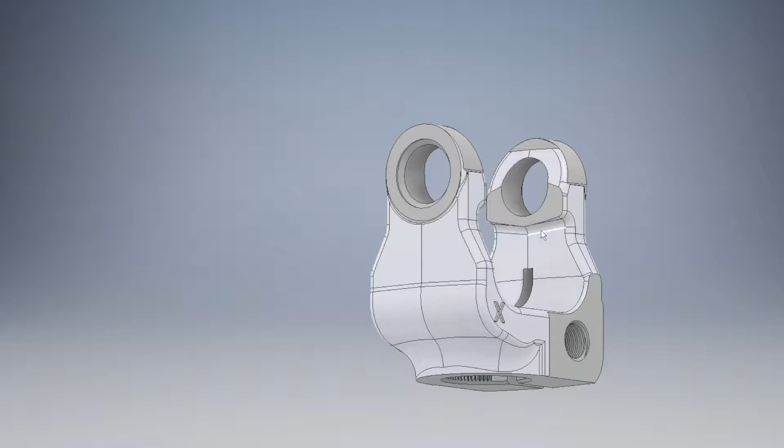Roop Automotives is engaged in manufacturing yokes, universal joints, intermediate shafts, steering sub-assemblies and column assemblies for Tier 1 suppliers across the globe.

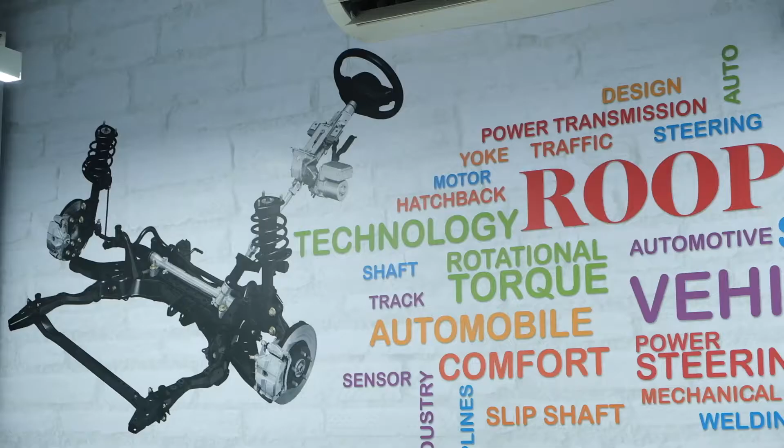We are the largest manufacturer of yokes in the world and we produce around 35 million yokes per annum. All the global manufacturers of passenger cars use our products.

Roop Automotive established their R&D in 2012 with the vision of doing basic innovative research in the field of processes, product design and manufacturing, so that we can compete with global competitors in the field of productivity, cost and quality.

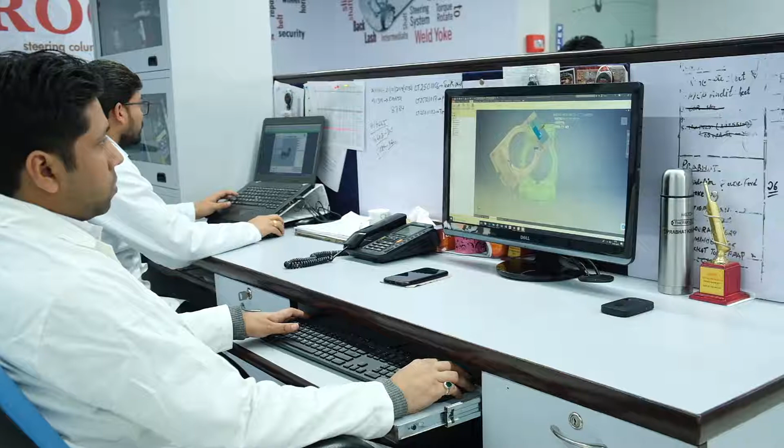We are doing our R&D in the field of product design, process design, and we are also improving our existing processes for mass manufacturing.

The main objective of our R&D was to improve the processes, to innovate the processes, to improve the quality of the product, and to cater to the demand of technical complexity and tight tolerances of our customers.

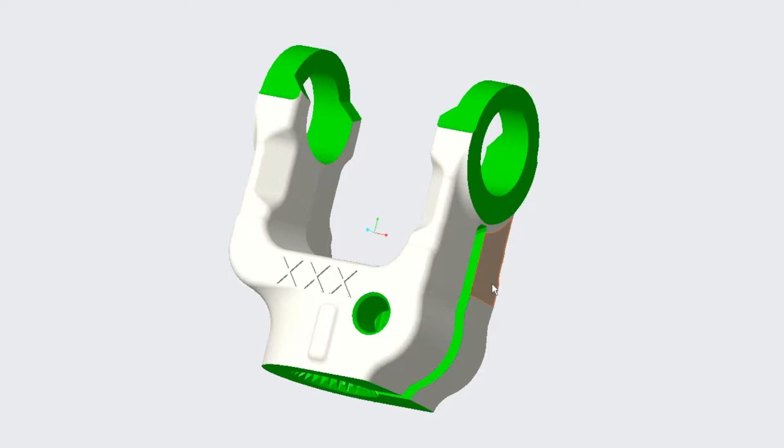So we are continuously engaged in innovating and finding new processes and new design methods, and we are applying our capability of simulation with the help of CAE software so that we can come up with the global standard.

of technological advancement for our customers. Currently we are doing two major projects. One is...

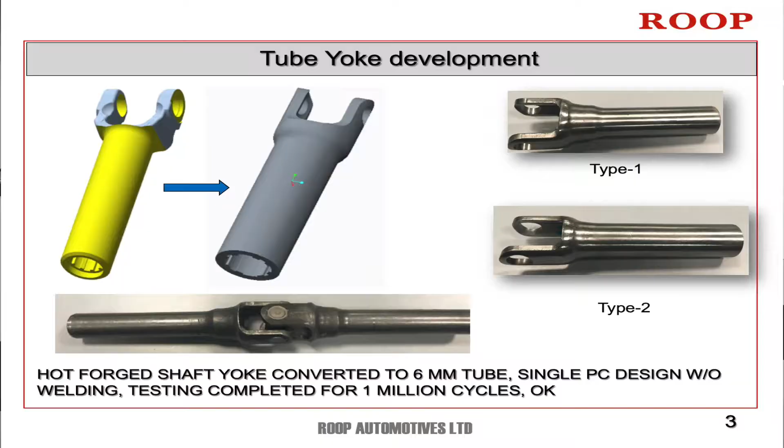single piece tube yoke, which is a replacement for one assembly comprising a yoke and tube welded together. By doing this project we will be able to eliminate the welding process, which is considered a very critical and special process.

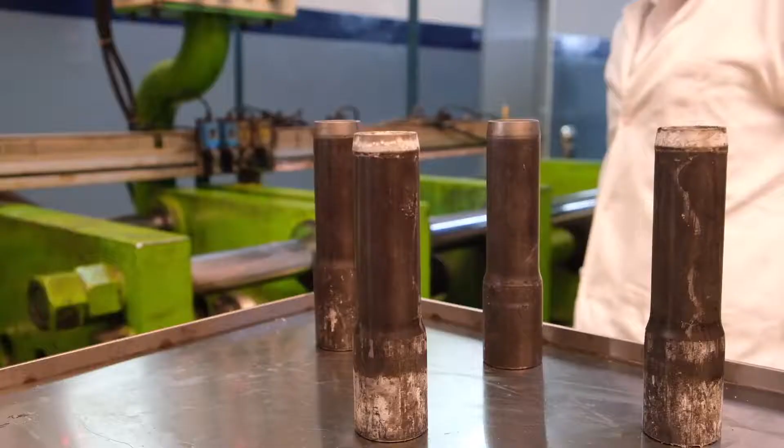So it is always said that no welding is the best welding, so we are eliminating the welding process. I am Pramod, working in the R&D center. We will make the tube yoke from the tube using a forming process on a hydraulic press.

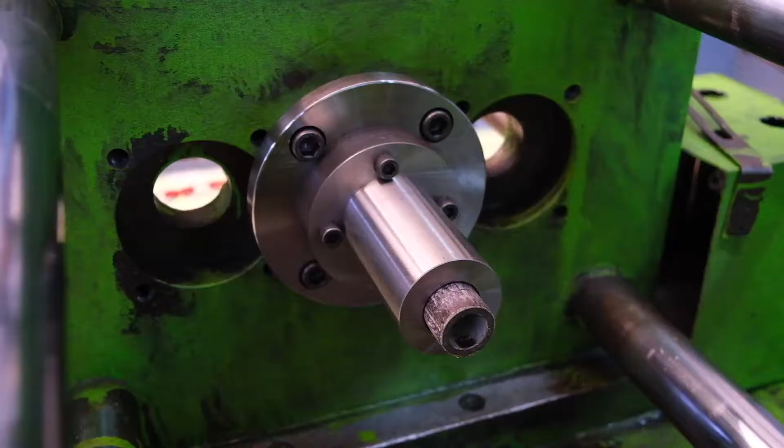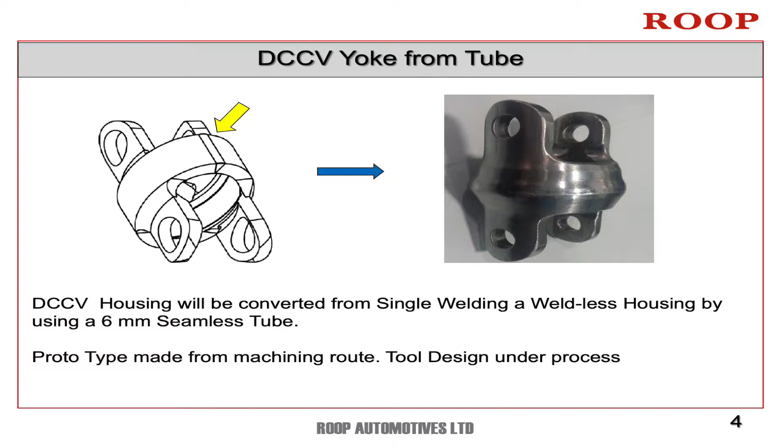The second project we are doing is converting our existing single-welded double cardan yoke into a no-welded double cardan yoke.

That is again made from a seamless tube. So these are the projects we are working on.

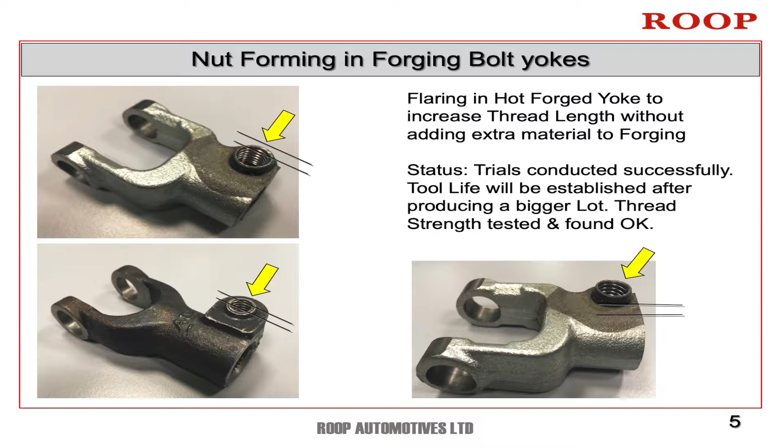Third project we are working on is nut forming by hot forging, in which we are doing a hot forming process so that the complexity of the tool is reduced, the life is increased, and the length of the thread is increased to cater to customer requirements.

So these three projects we are working on. I'm Nilanshi and I'm in charge of the R&D floor area. Here we are doing nut boss forming by hot forming process.

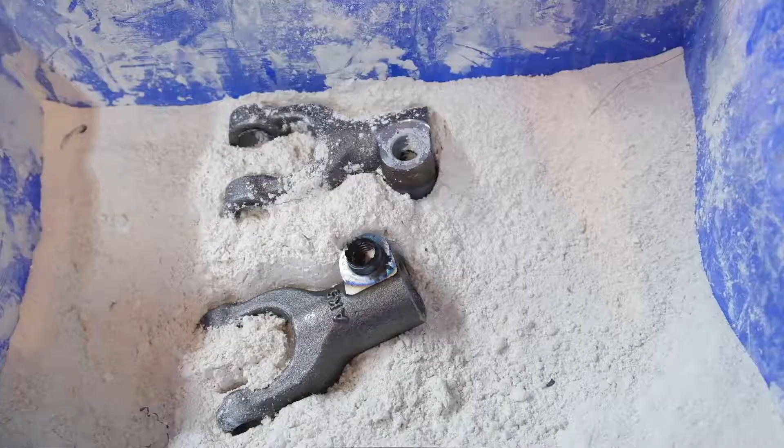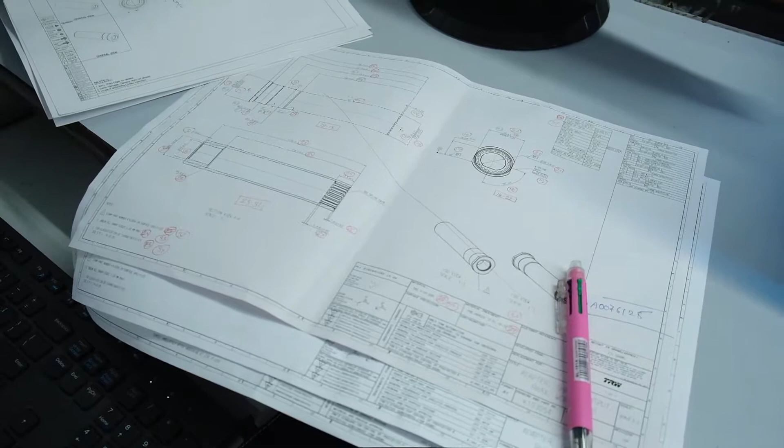Our R&D division is segmented into 4 parts. First is product engineering, which handles documentation and process flow diagrams and other activities like preparing control plans and PFMEA.

Second segment is the NPD section, which converts the actual input from product engineering into samples, and they manufacture on the shop floor and test the samples.

They verify the process flow made by product engineering, and they convert the inputs of product engineering into a real, physical product.

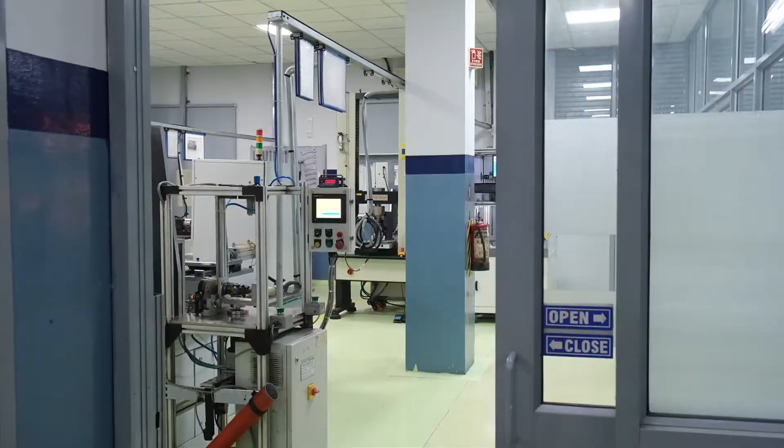Third segment is our testing lab, which caters to all our testing requirements, and we keep adding new machines and new methods of testing so that we don't miss any kind of failure which can reach the customer.

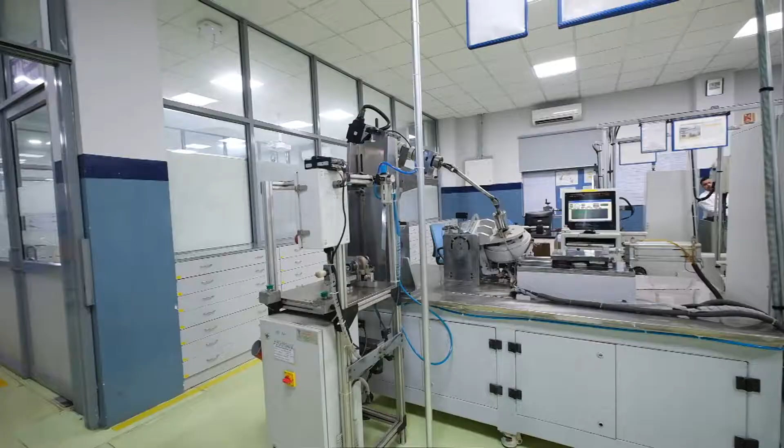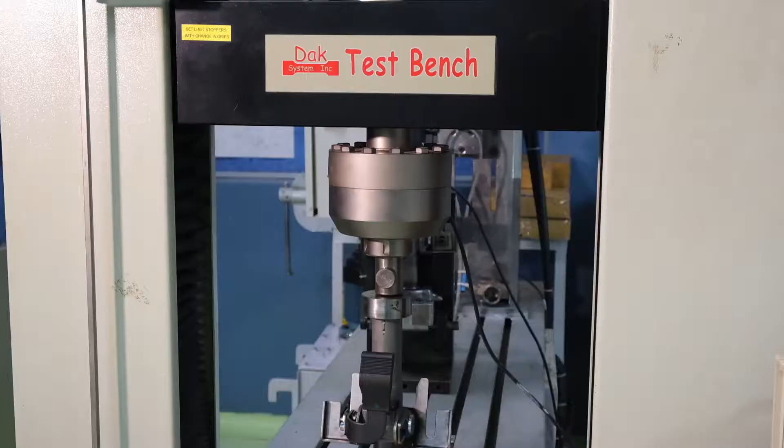This is another torsional fatigue tester. The maximum capacity of this machine is 3 Hz.

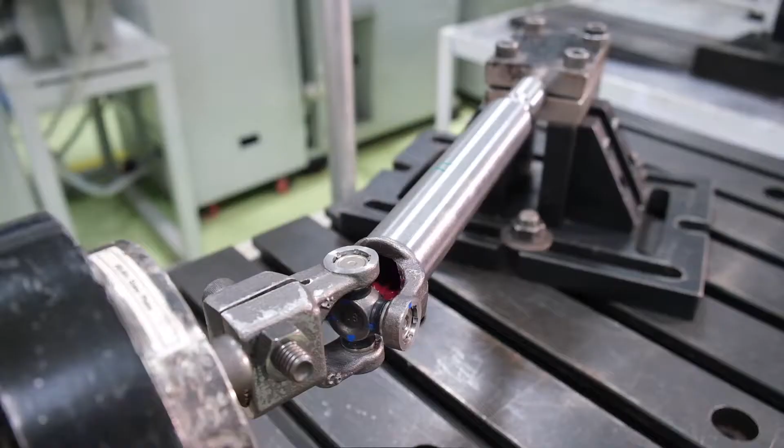This is also a fatigue testing machine, and the difference between the previous machine and this one is only the frequency. The capacity of this machine's frequency is 15 Hz.

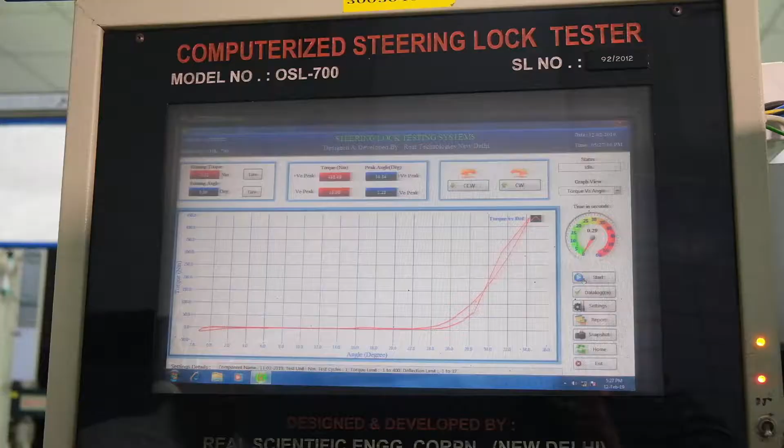This is a torsional strength checking machine, with a maximum capacity of 700 Newton meters. On this machine we can check the torsional strength of any tube or universal joint. This is a 7-step endurance testing machine, where we can apply 7 types of torque within a single program.

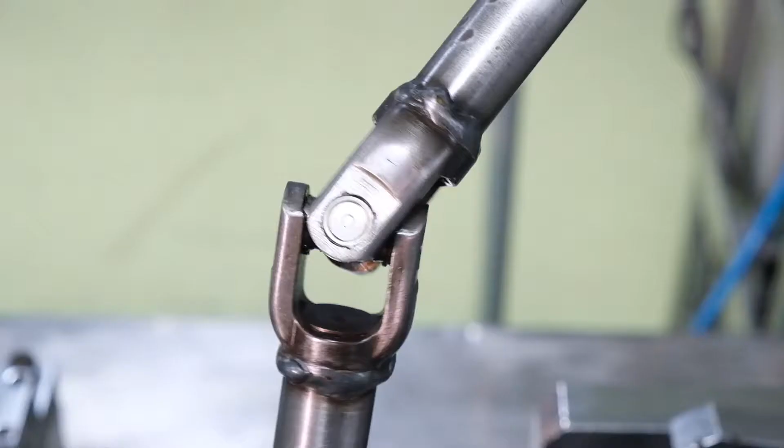This is a fully rotational torsional fatigue tester.

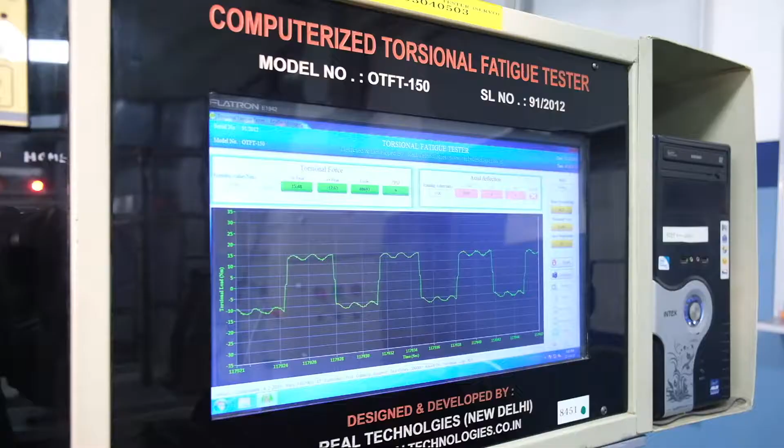On this fatigue tester we can conduct 2 types of tests: one is the simple rotational test, and the second is the rotational test with climate conditions.

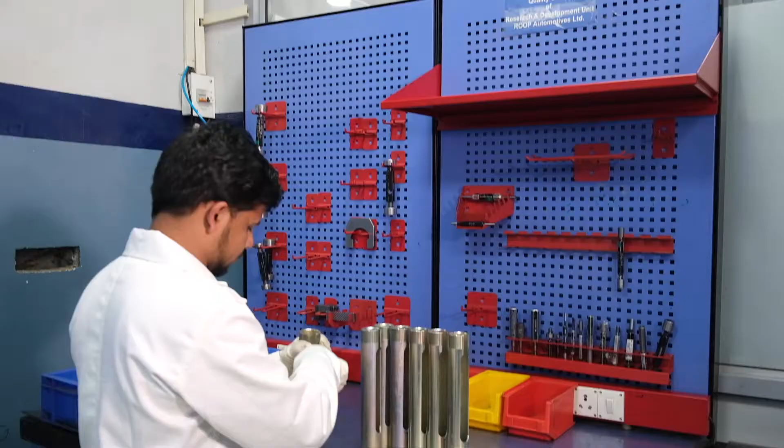The fourth segment is our R&D quality checking team, which is dedicated to quality checking all the material produced, so that our testing results are in sync with our specific requirements and specifications.

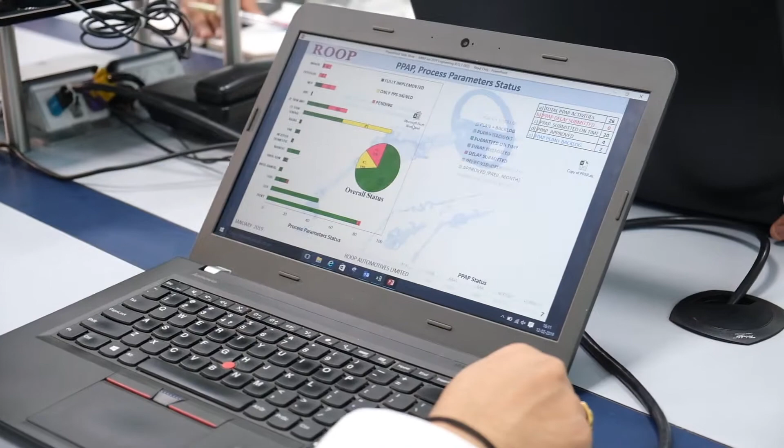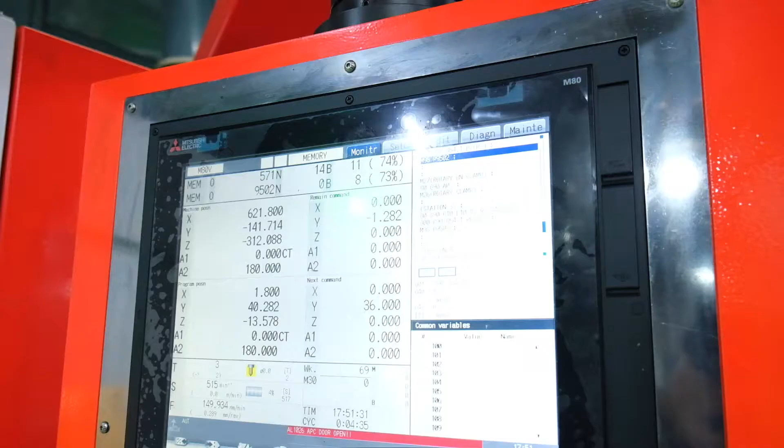Welcome to Roop Automotive's manufacturing plant. It is our main plant for domestic yokes. This plant has 6 lines. In all lines, we make yokes for different suppliers and different models. Now I will show you our main domestic line.